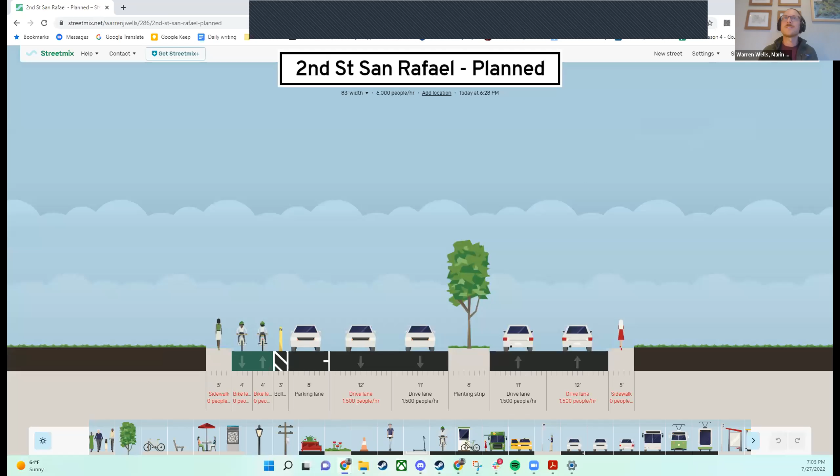This is the second in our series of Zoom advocacy trainings, on the basics of Bikeways. Just a quick overview of the evening: I'll go quickly over MCBC, what our work does and our mission, staff introductions, recap Advocacy 101 briefly, and then dive into the meat of this training, which is planning for bikes. We'll talk about speed and safety, types of bikeways, and intersections - those are the biggest parts. We'll touch briefly on how bikeways get built, and then have a hands-on activity. We're going to send you to breakout rooms and have you design your own streets really quickly. Then Q&A and wrap up.

Just to review MCBC's mission: our mission is to create a healthy, connected, and sustainable Marin by promoting bicycling for everyday transportation and recreation. We just like to remind people of that ahead of time. So here from MCBC staff tonight, we have me, Warren Wells, Policy and Planning Director, as well as my colleague, Matt Farber, who's the Program Director of Corey's Ride. We're happy to welcome you all here.

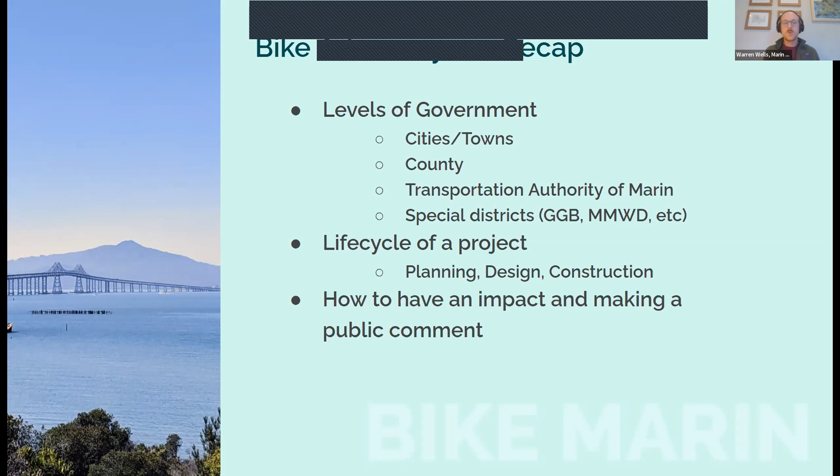We covered in that meeting the levels of government we're in. We talked about the difference between unincorporated county and incorporated cities. We talked about the different organizations that govern Marin - the county, the Transportation Authority of Marin, or TAM, as well as special districts like the Golden Gate Bridge, Marin Municipal Water District, Marin Transit, et cetera. We talked about the life cycle of a project, how a project goes from an idea to reality - planning, design, construction, and funding.

And then last week we did an exercise on how to have an impact and making a public comment at a meeting.

Okay, so this meeting is about planning for bicycles and the basics of bikeways. This is just transportation theory, the very basics. When you're planning transportation, you have three things: a vehicle, your termini - your origin and your destination - and the trip itself. When we talk about vehicles, we also use the word mode - that's walking, biking, bus, ferry, car, and cars usually in transportation research we divide into carpool versus a single occupancy vehicle. Each mode, there's not a better or worse mode - they all have different benefits, costs, speeds, sizes. It's pretty far to walk to Humboldt, but if you're going to the grocery store 2 blocks away, maybe walking is the best option.

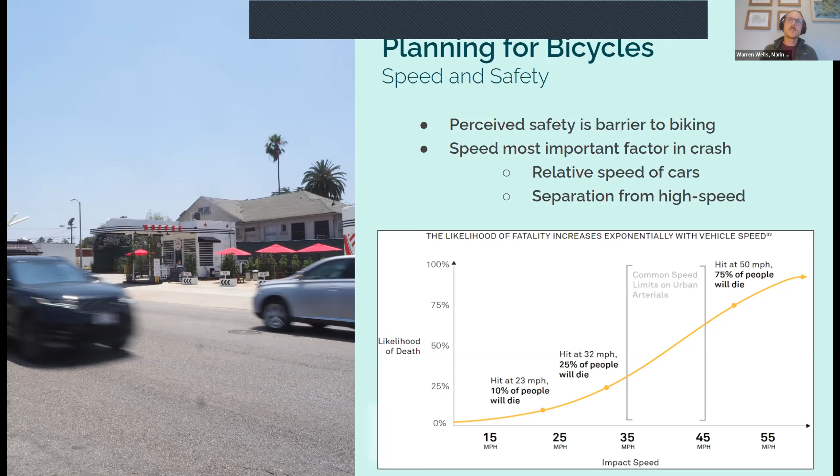So people understand, and I think rightly, that biking next to rushing cars doesn't feel safe, and so they choose not to do it. But we can mitigate this. The ways of mitigating this are by slowing the relative speed of a person on a bike and passing cars, or fully separating bicycles from traffic.

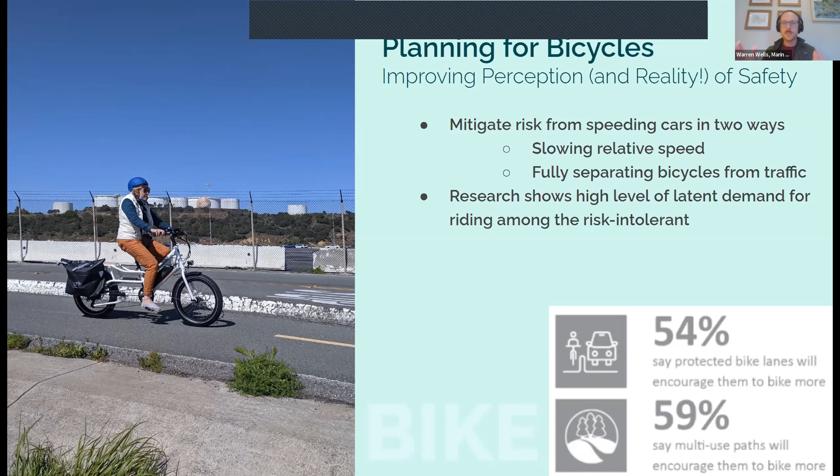So next we're going to talk about what are these different types of bikeways. We hear class 1, class 2, class 3, class 4. It's very confusing. I just want to say at the beginning, there's not going to be a test at the end. Don't feel bad if you don't have it all memorized. That's what this is for, that's what we're here as a resource to answer these questions. And it took me a long time to actually get this stuff to a point where I could say it offhand.

In California, we have a classification system for bikeways: classes 1, 2, 3, and 4, often written with numerals. The ordering is confusing—there used to be just class 1, 2, and 3, and they added class 4 in 2017. It's not a ranking. Context and design matter a lot. There's not a better one for all instances—some are better in one place, some in another, and the design and implementation can affect both the perception of safety and the actual safety. So all of them have their place.

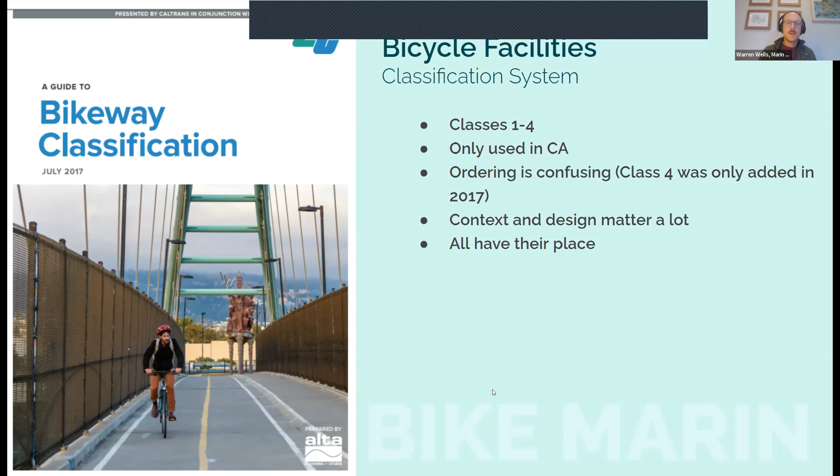Okay, so I'm going to run through these different classes. Class 1, also called a multi-use path or a shared use path, these are fully separate facilities. It's a different grade than automobile traffic, so it's not in the road. They're always two-way, shared with pedestrians, not just bikes. They could be next to a road, but they're not in it, not below the curb. Typically, class 1 paths are found on old rail rights of way, along creeks or rivers, occasionally next to a road, but not as frequently as we might like. They're considered low stress facilities—like the Bay Trail aims to be a class 1 path. It's something that everybody from your 8-year-old niece to your 80-year-old grandmother can ride on. In terms of width, they're minimum 8 feet wide, ideally closer to 12 feet, like you see here on the Mill Valley-Sausalito path, with unpaved shoulders for jogging.

Next, you have class 2 bike lanes. These can be referred to as standard bike lanes, basic bike lanes, or typical bike lanes. This is kind of what I would consider the bare minimum of bicycle accommodations. It's a space set aside on the street where bicycles can ride, and it's better than nothing. You have a place to be. People can pass you, you're out of the way of cars, and you have a place where you can travel forward.

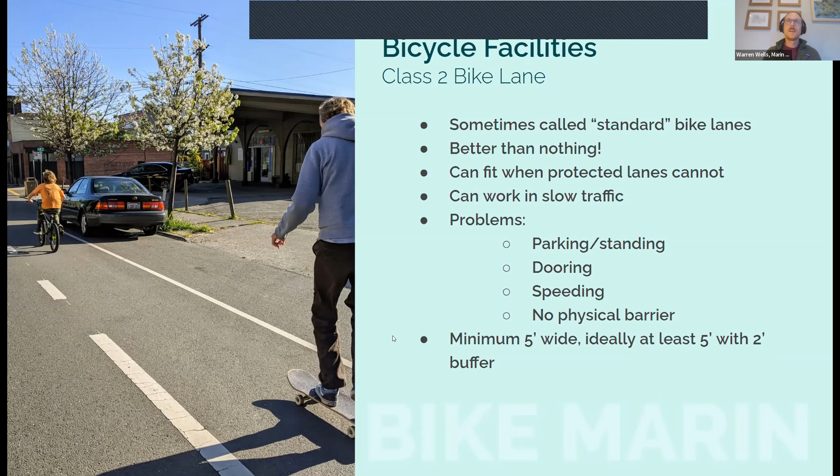Next up are Class 3 bicycle routes. A Class 3 bicycle route is typically just signs. You'll see a green bicycle route sign, stencils like you see here on the ground, and not much else. They're typically designated on low volume neighborhood routes where bicyclists might want to find themselves. So in that sense, Class 3 routes are much more of a wayfinding device than actually a means of separating people from car traffic. Well, they are separating people from car traffic by saying, hey, you should bike over here instead of on this busy road.

You'll often see a sharrow, which is a bicycle icon and a chevron, or a bike boulevard stencil like this, on many of those Class 3 bicycle routes. That's intended to demonstrate to riders the proper location for them to ride, i.e. not too close to car doors, and to suggest to motorists that bicyclists are allowed to ride there. The research shows that sharrows result in marginally safer driver behavior, but anecdotal evidence from many riders is highly mixed, and they are looked at with some derision by many.

In practice, Class 3 routes kind of get used by traffic engineers when they don't want to make any other trade-offs. When they don't want to reduce the number of vehicle lanes, or they don't want to get rid of parking, they'll say, hey, we made it a bike route, we put some stencils down - which, without other traffic calming, without other mechanisms to slow down drivers, may not add much comfort to those low risk tolerant riders like my mom.

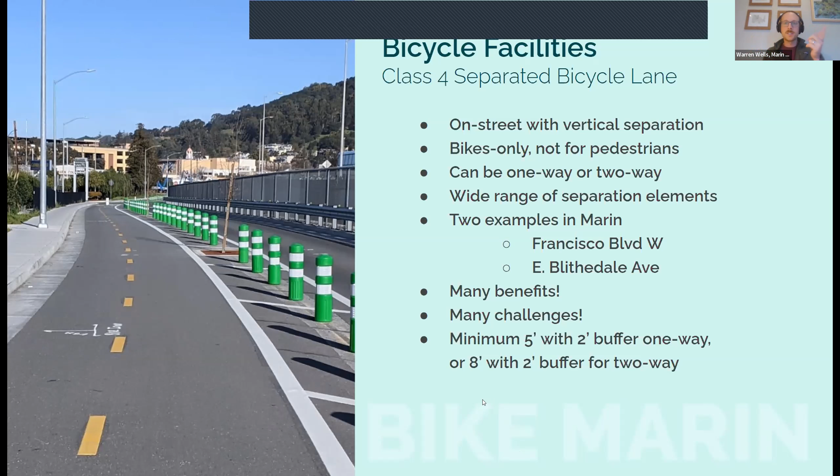So I mentioned that they can be made of different things. I'm going to show just a few examples to see the whole range of a class 4 bike lane. So these are what are called K71 flexible bollards, also known as flex posts. This is the new bike lane in Mill Valley. This is a precast curb, so these are made elsewhere and bolted down. You might also have a poured-in-place curb, which is like a custom job for the particular street.

It can be separated by parked cars as well, so you see this is a parking lane next to the driving lane. There's also some flexible bollards or posts in there, or it can be separated using K-rail or Jersey barriers, depending on where you're from. This is the Richmond San Rafael Bridge.

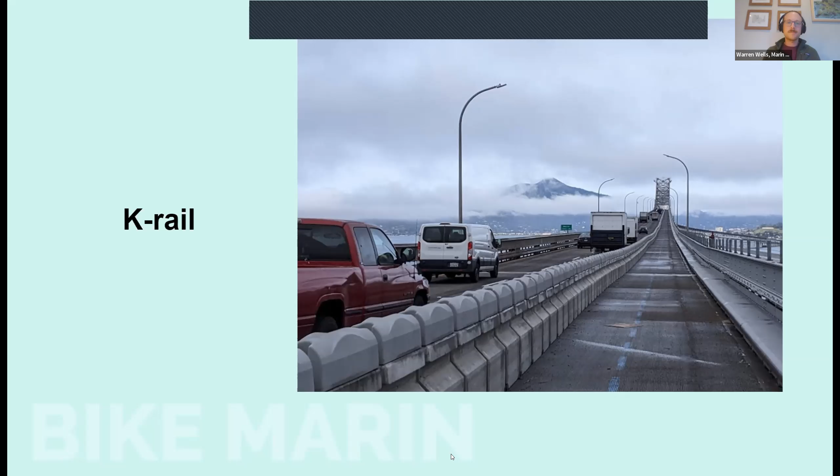Okay, that's a lot. We'll do a quick break to see if anybody has any questions that have come up so far.

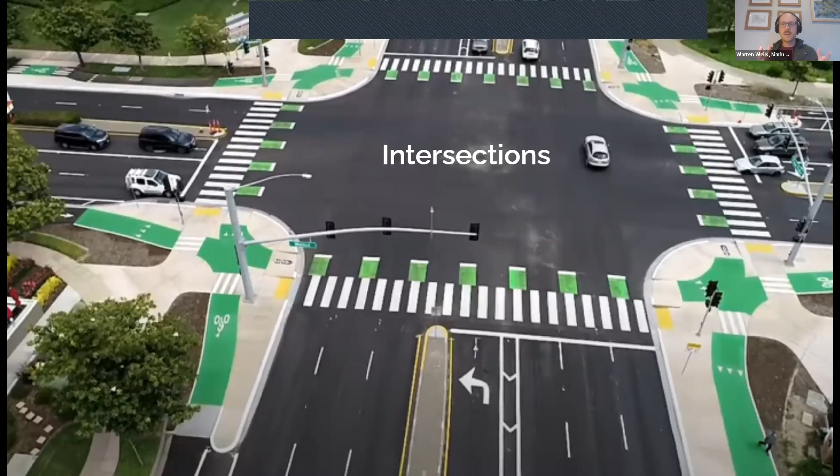Okay, diving back in. So next we're going to come to intersections. We've talked about the mid-block sections, what happens between intersections, and now we'll talk about intersections briefly. One of the biggest challenges to biking often comes at intersections.

So much so that NACTO, the National Association of City Transportation Officials, wrote a whole design guide called 'Don't Give Up at the Intersection,' recognizing that many streets are designed in such a way that even if there are bike lanes, even protected bike lanes at the mid-block section, once you get to the intersection bicyclists are sort of left to fend for themselves.

So there are challenges and then types of crashes. Challenges: comfort going through intersections when cars are making right turns or trying to turn past you. Often you might have to execute what's called a weave, where if you're going straight and a driver is trying to turn right, you'll have to switch places, which might work on the freeway but is a little uncomfortable when you're on a bike.

And left turns, especially if you're trying to make a left turn across multiple lanes of traffic on a one-way street, that could be a real challenge. It seems like traffic engineers don't even imagine that bicyclists might want to turn left, which we do.

Types of crashes that happen at intersections: you have a right hook, where you're going straight and a driver turns across you and you broadside them. On a two-way facility, you might have what's called a left hook.

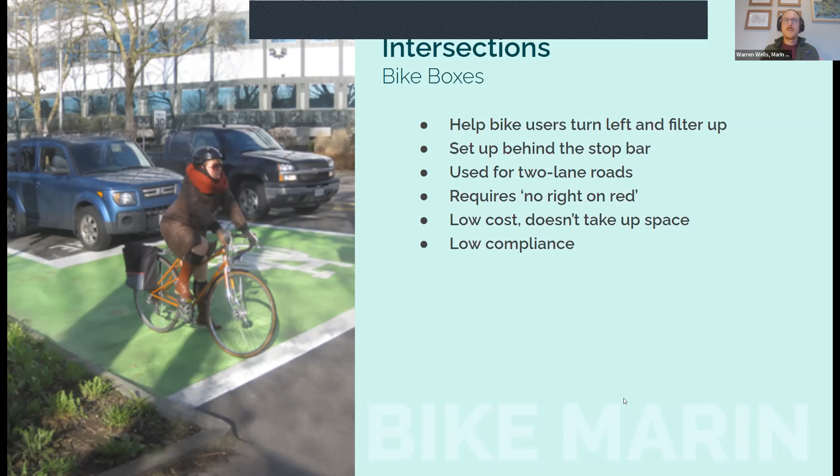It's low cost, doesn't take up much space. Compliance might not be great as drivers don't really know what it is, but it can represent an improvement. Usually it's best used for two-lane roads, one lane each way. Oops, I went the wrong direction, sorry.

Next you have two-stage left turn boxes. This is a way to facilitate a left turn, like a Copenhagen left. You see that little green box with the arrow - that's the place where a bicyclist going from left to right, instead of trying to turn across cars, would stop in that little box and queue up to then go straight when the light turns green with the cross traffic. This could be a better way of facilitating left turns on wider roads.

Again, also low cost, but it requires a larger intersection to do it.

It's also not obvious to all riders what they should do, and it can be kind of uncomfortable to sit there as cars are whooshing past you.

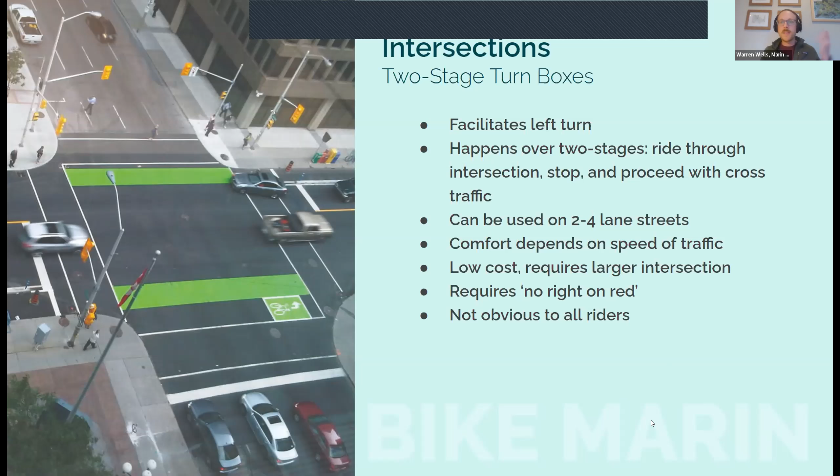So next you have the gold standard of improving intersections for bicyclists. This is called a protected intersection. It addresses both right hooks and left turns.

So if you, Matt, can you see my mouse? Is it visible here? Great, yes it is. Just to trace with you here: if you were going north to the intersection, you would come on this little bike lane, come out to the side here, and then cross the street as opposed to crossing through next to the cars.

What this does is if a driver is trying to make a right turn, they have to slow down before they make that turn. They can't whip around, and they also see the bicyclist more visibly in front of the car, as opposed to through a window or the A column where visibility is more limited.

So for bicyclists going through, you bend out, cross, bend back in, and go ahead. If you make a left turn, you're just navigating the outside of the intersection—go straight, then cross here and come over here. So in all those places you're coming into much less conflict with cars, and you really have to sort of sprint across otherwise. Protected intersections are more expensive.

There's also a lot less exposure for pedestrians because the crossing distances are shorter and drivers are coming more slowly. So there are benefits for everybody at these intersections.

They're more expensive, and it could be hard to convince engineering departments to do them. We don't have one in Marin yet, but there are a number in the Bay. The city of Fremont has actually been adding a number of these with significant success—that was the picture I showed you up top. Hopefully we'll see more of this in the future.

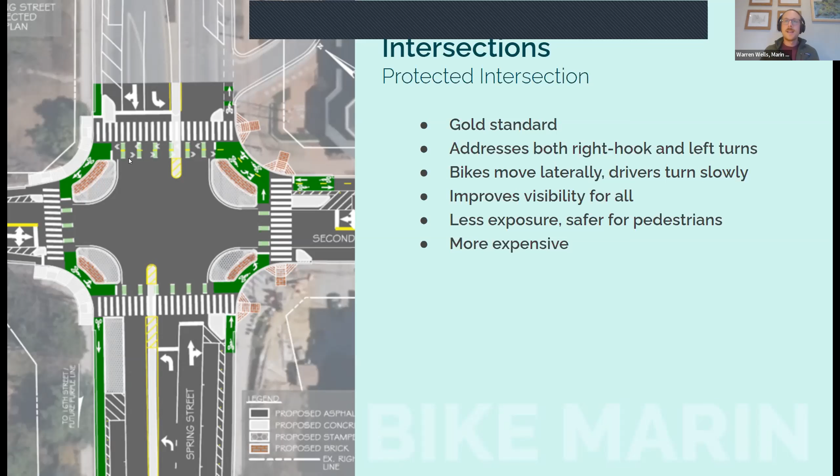And the last one—I'll talk about a protected corner. This is just kind of like a quarter of a protected intersection. It's not as good, but it can help a lot.

This is actually a place where I almost got right hooked—I would have been right hooked if this weren't there. So again, this accomplishes the same thing of bending the bicyclist out a little bit and forcing drivers to slow down on their turn.

It's cheaper—it doesn't involve moving the whole curb. They can be done with concrete, as you see here, or quick build, sometimes with those beefy bollards.

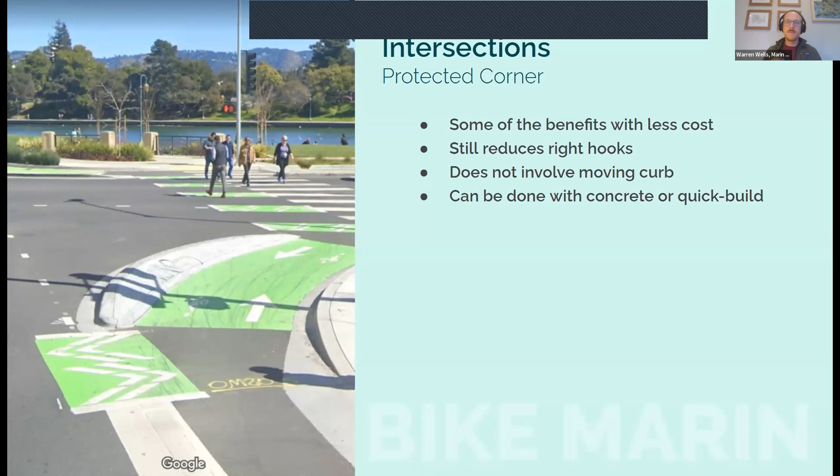And kind of the dream scenario is what you call a Dutch roundabout. These provide a dedicated space for riders—there's kind of a roundabout outside of the roundabout. Roundabouts are great for a lot of reasons.

They reduce conflict points—there are a lot fewer crashes that can occur. There's really no possibility of a high-speed crash since you have to slow down on approach, and you can't really have a head-on, and it's hard to have a T-bone. So it's actually much safer for drivers as well.

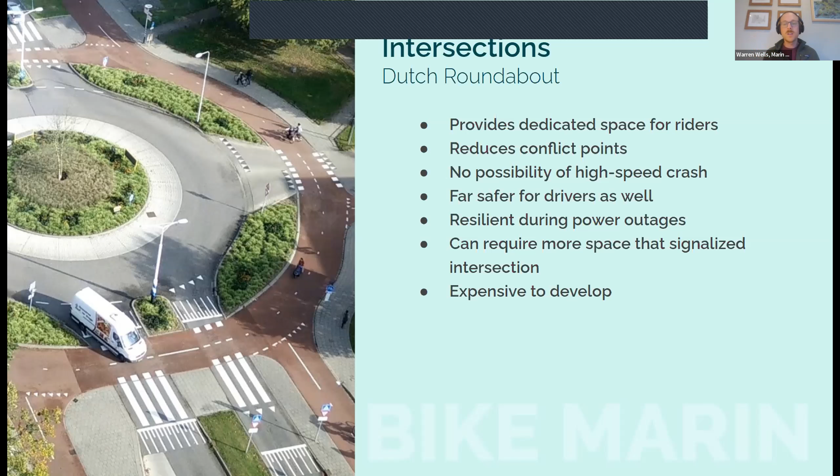They're resilient during power outages—a driver can't knock down a light by running into them—so they're cheaper to maintain. They do require more space and can be expensive to develop in the first place, but the maintenance costs are much lower.

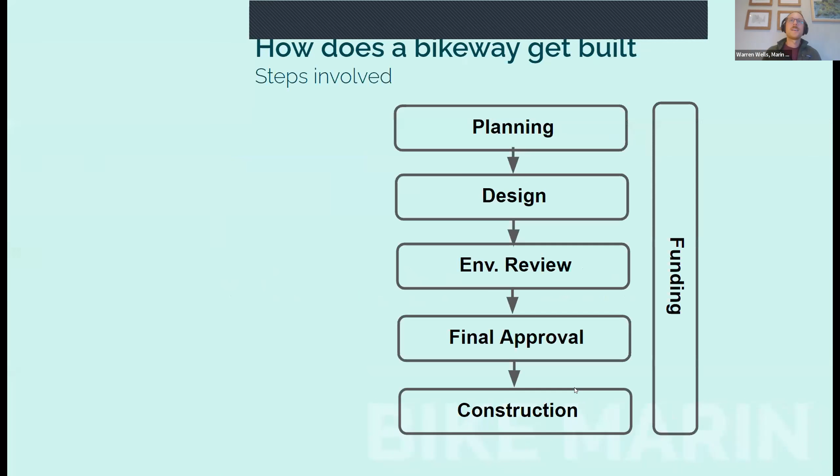Okay, so this is a slide from last month's webinar, just kind of very high level how a bike lane gets built. Steps involved: you have planning, design, environmental review, final approval by a deliberative body like the city council or the county, and then construction and funding happens.

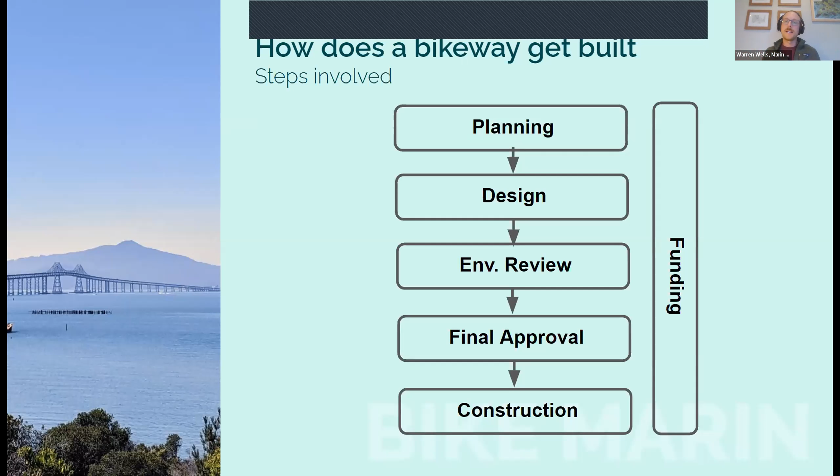Funding is needed throughout. So I just want to touch on the bicycle master plan, which is, I think, something that a lot of people don't understand—certainly something I didn't understand before I started doing this work. The bicycle master plan lays out what might happen, kind of what should happen.

It doesn't mean things are a mandate. It doesn't mean things will happen. You need it there, but it's not enough—you still need advocacy from me and folks like you. So the bike plan is really important in a lot of ways, though.

It sets policies, it sets design guidelines, those things I was telling you about, like here's the minimum width of a bike lane versus a maximum width, preferred width. It sets those guidelines and says, hey, in the city of Mill Valley, in the city of San Rafael, this is how wide we want these facilities to be, or this is the kind of intersection we'll design. So it's really important in that regard.

We talk about intersection treatments, and lastly, kind of the meat of the bike plan is the network. So it lays out a plan for which streets should have what types of bike lanes on them. So this street gets a class 2, this street gets a class 4, this street all we can fit is some signage, so it's a class 3.

And that process is one that advocates have a role in. Typically, the bike plans are developed by consultants. Sometimes they're developed in-house, depending on the city. But advocates like you and me have a role in reviewing those initial plans that come up and saying, hey, actually, I think that on this street that you said you can only fit a class 2, I think we can actually fit a class 4.

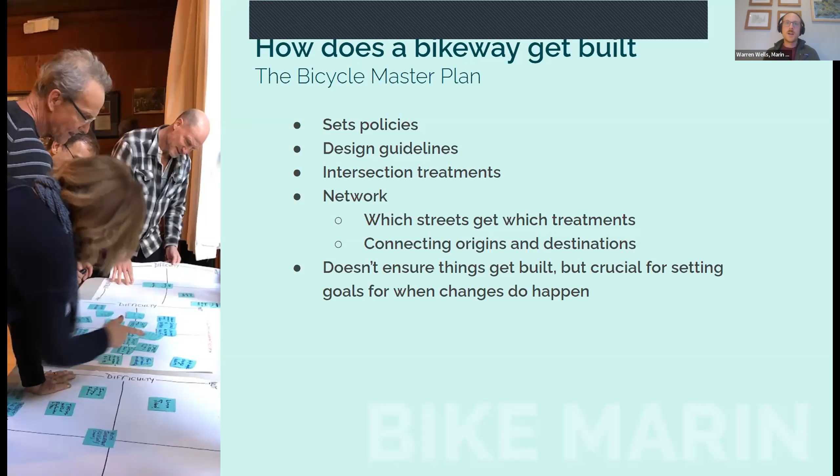So bikeways get built in a few different ways. One is through annual repaving. Every city has a budget where they go and repave a certain number of streets every year. Usually they focus on the ones that are kind of like the worst off, so you get the biggest bang for your buck. When you do this, there's limited potential for change.

Typically, they're not going to put in big barrier protected bike lanes during repaving. It's typically a chance to either widen a bike lane or put a bike lane in a place where there wasn't one, but there is room for one. These are funded with the city's annual paving budget. There's money for this, and so it's important that if a city is doing a repaving on a street, we want them to at least bring that up to what they have in the bike plan.

That doesn't always happen. It's not happening right now in the city of Larkspur, where they're repaving Magnolia, but not bringing it up to what's in the bike plan. But it doesn't have to happen during repaving.

They can happen during a redevelopment if there is a hotel or a new apartment complex going in, as a condition of development. Maybe SMART or the city of Novato might say, hey, you're building this thing here, we want you to build part of the SMART pathway behind your new hotel here, or we want you to protect this bike lane. We have it in the bike plan that's supposed to be protected. Right now it's not. On your frontage, we want you to protect it. These tend to be rather small projects and not long corridor wide projects.

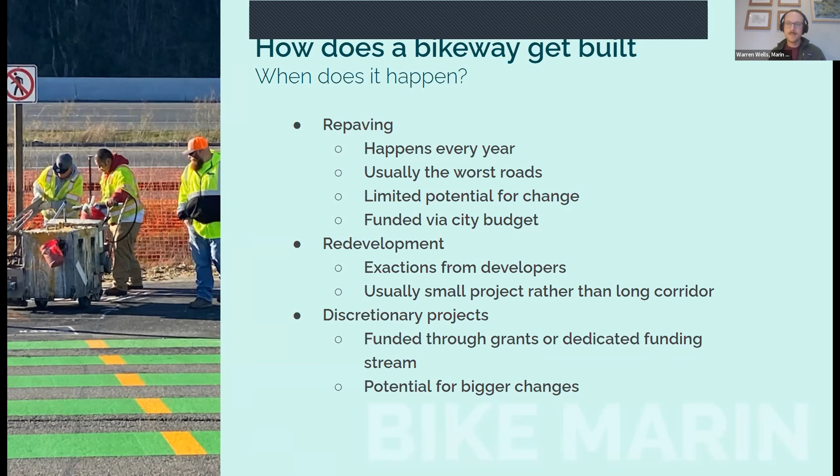I was just curious about the redevelopment portion. That is required as a stipulation in building a lot of the time? It can be. It's on the city to do it.

When a city is deciding whether to approve a building permit, they can require what are called exactions out of a developer. They can say, we'll approve this if you do this thing, and the developer can say no, or it's part of the negotiations. Especially when there's a lot of construction going on already, the best time to build something new is then, so maybe the city chips in, but it's a great opportunity for someone other than the city to pay for it.

An example of this happening right now is the Costco at Vintage Oaks in Novato. There was a project, kind of mired in some environmental stuff, where they wanted to expand their gas station. To do so, they had to build a bunch of new parking in the back on Rowland Boulevard. As part of that process, they're also building a Class 1 multi-use pathway all the way behind Costco, which the city required of them. It was actually my predecessor Bjorn's idea, and Costco is paying a large share of the cost. It's a shorter project, but in this case a pretty important one.

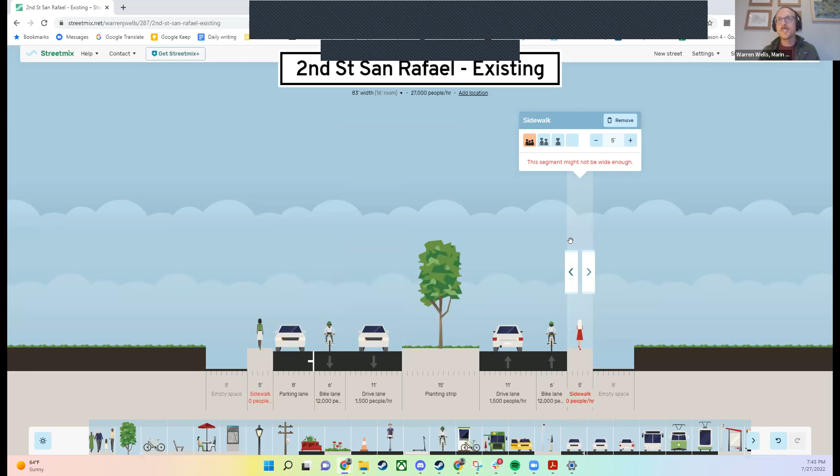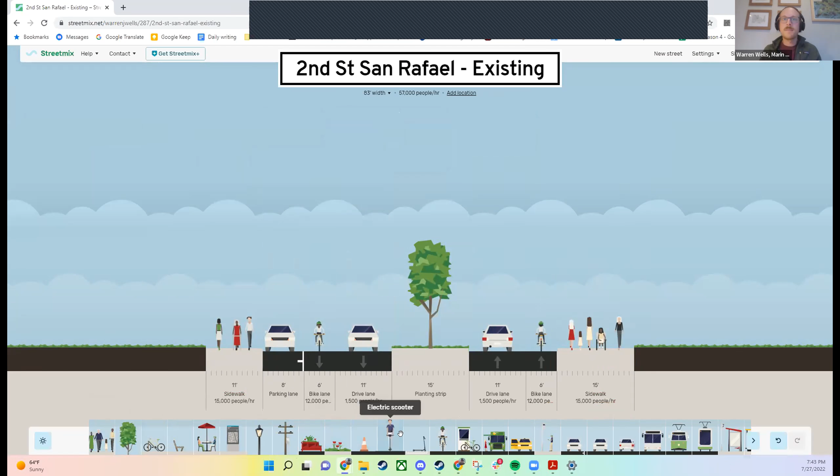Actually, we have a lot of space to work with still, so I'm just going to widen the sidewalks to 15 feet here, and 11 feet here. So it's pretty user friendly—you can drag and drop as you want, you can widen things up here with these plus and minuses, or you can see a wide variety of different things you can put in the right of way down here. Most of what you'll be using are sidewalk, bike lane, parking lane, drive lane, turn lane.